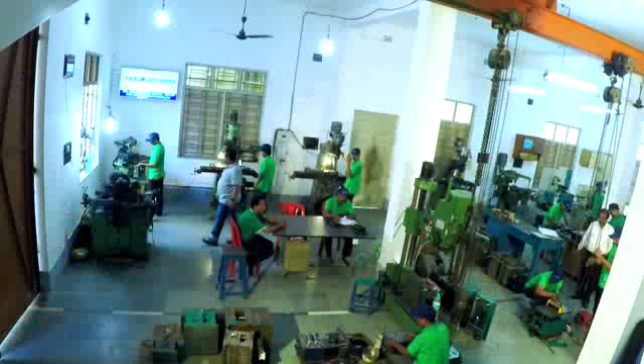Now they make die and mold for a number of engineering companies, including Indian Railways. At present, around 40 people work in their 2 units. Their quest is always on for continuous improvement through further innovation and application of new technologies.

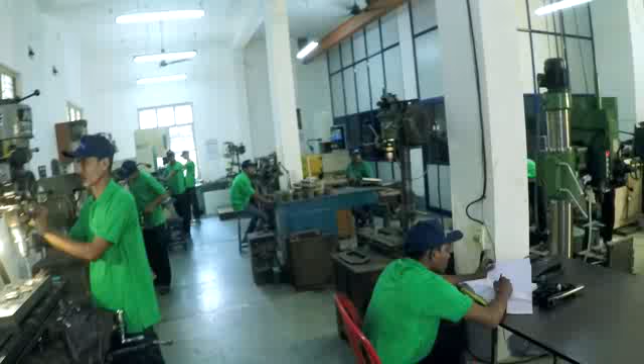Besides marketing, Mr. Sashmal also personally looks after the minute detailing of mold design. He makes sure that his minute monitoring and constant supervision is all throughout.

Actually, when I left my job, I used to get a salary of 300 rupees. A man who once used to get a salary of rupees 300 only now pays out salary to 40 employees under him.

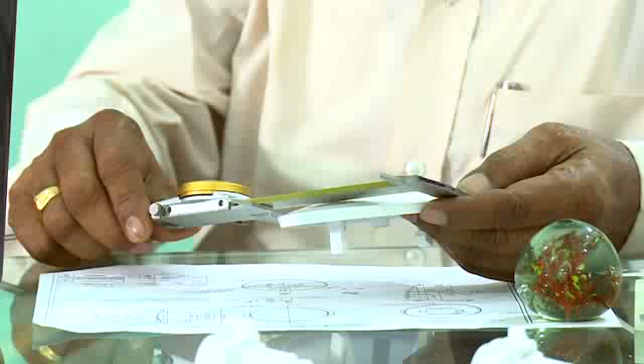Their present client bank includes Supreme Industries, Exide Industries, Philips, Orient Fans, Tata Motors, Rishta Polymer Industries, Sumangal Electronics, Plastotech Industries, and others, to name just a few. Not only in India, the molds and finished plastic goods manufactured in the 2 units are exported to SAARC countries and United States too.

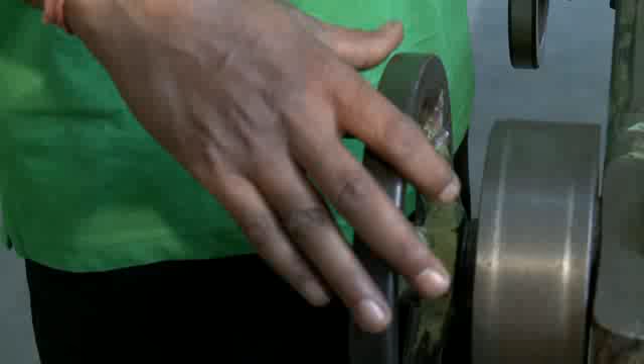Sree Dies and Molds - we have been associated for more than 10 years. I am deeply impressed by his knowledge, and whatever product today we are making, all the product dies have been made by Sree Molds, and I am more than satisfied with whatever product is produced using their dies. Their service is excellent, their quality of workmanship is excellent.

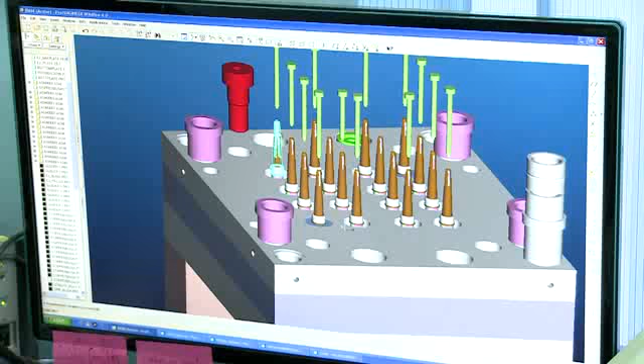Now let us explore the Sree kingdom and find out how they make all these precious and customized molds for respective clients. Once the component drawing is received, which is the first step, the planning can start for the designing of the mold through 3D modeling.

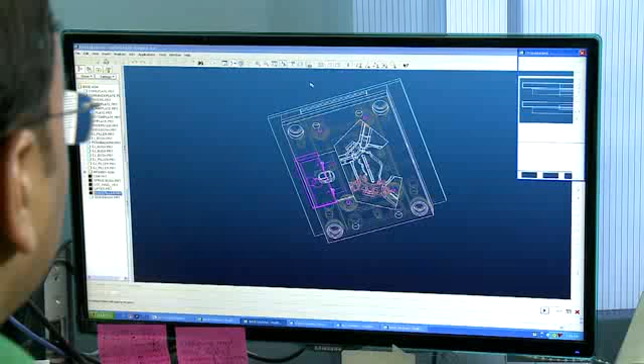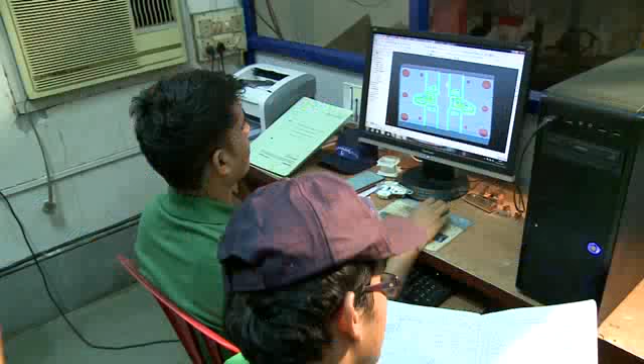Now comes pre-tooling, that is shaping, grinding and boring. The CNC programming follows, which involves the mold base and the core and cavity machining.

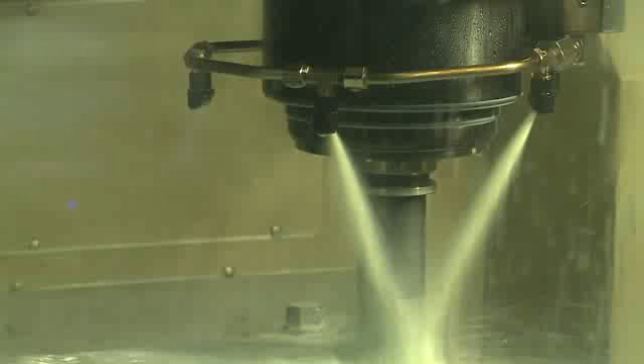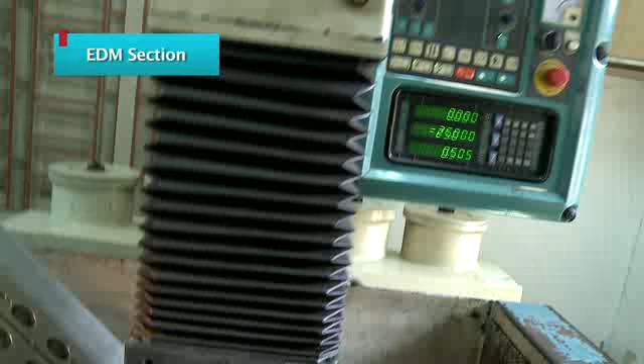The next step is electrode, CNC and EDM. Core and cavity, followed by EDM. The electrode is made on the CNC machine, and after that, it is sparked on the EDM machine - meaning EDM is done on the cavity.

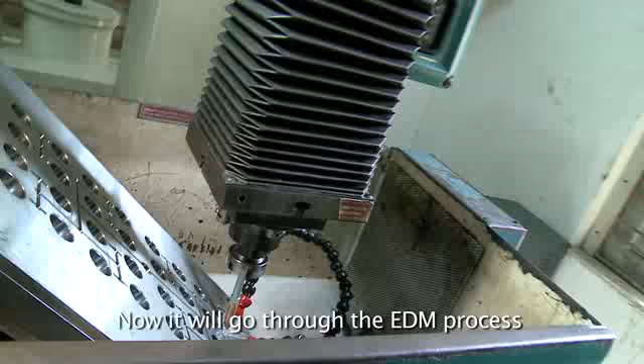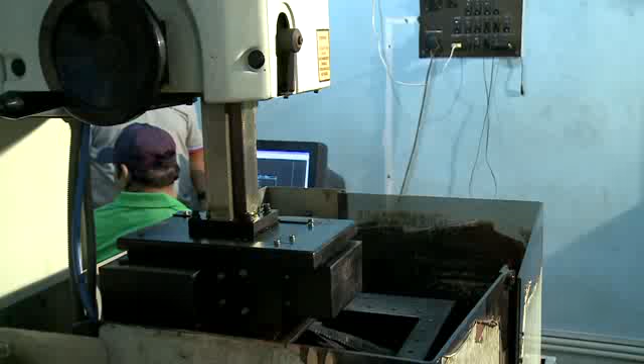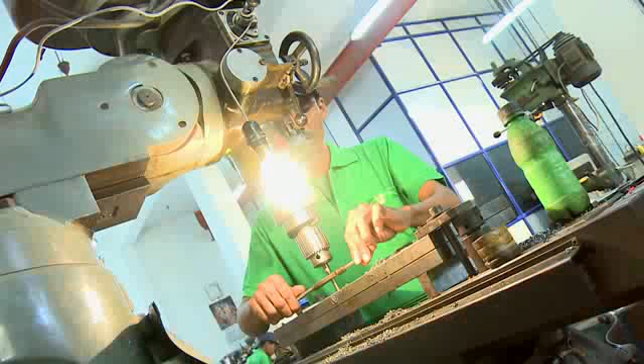Now to the tool room. The milling, grinding, assembly and polish of the mold is done at the tool room. The polished and finished molds are checked and the first trial is conducted in-house.

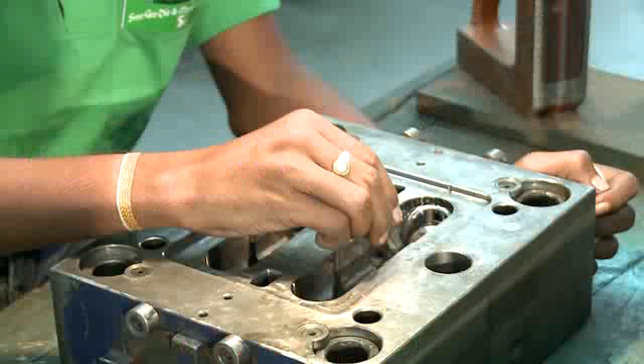The product validation report is generated and necessary corrections or reviews are done before it is sent for the second in-house trial. This is a core plate piece that has come here after CNC machining, for inspection.

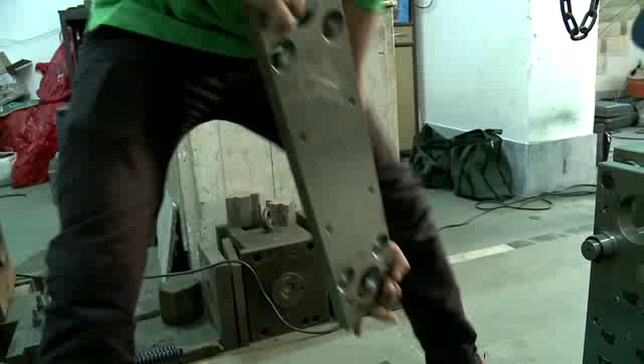The brother duo really make sure that their product attains perfection before going out to the customer. The final sample passes through stringent quality control and assurance parameters.

We are satisfied with the job of this gentleman. Sashmal actually, to be named, and his brother also quite efficient in production jobs. As far as engineering is concerned for tool making and mold making, they are quite competent. They have got good experience and knowledge in this line. They are time-tested people, and we are quite satisfied with their job.

They have opened their in-house mold testing unit and solved the problem they faced earlier. This unit has gradually elevated to a full-fledged plastic product manufacturing unit.

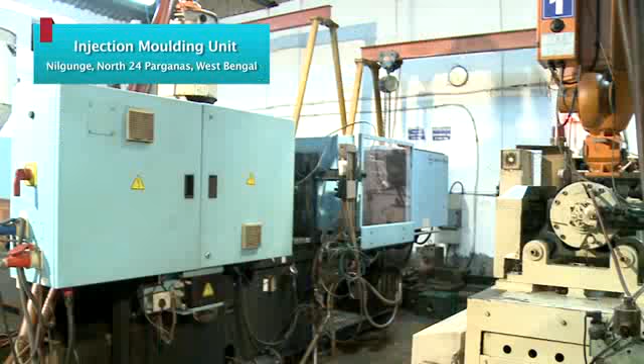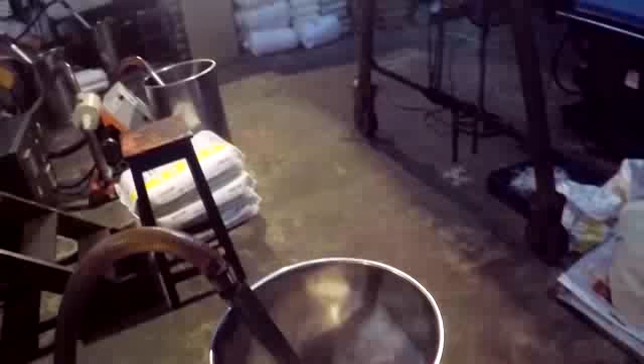Now to the other kingdom, the processing unit where the plastic goods are produced through the injection molding system, the molds being indigenously produced in Sree's factory itself, after procuring the raw materials from Haldia Petrochemicals, Reliance, Absolac, Dupont. In this factory also, like the previous one, the necessary corrections and reviews are done, including the first and second trials, and the sample is drawn out and all samples are thoroughly checked before the final product is rolled out.

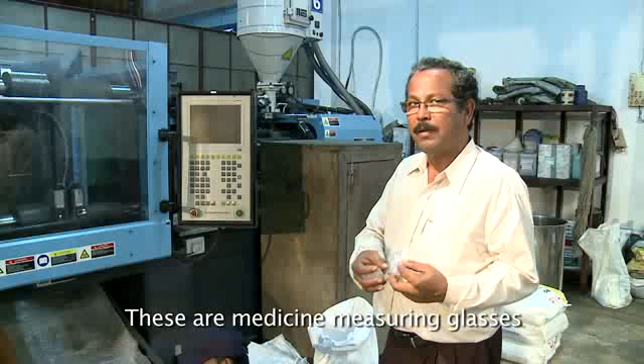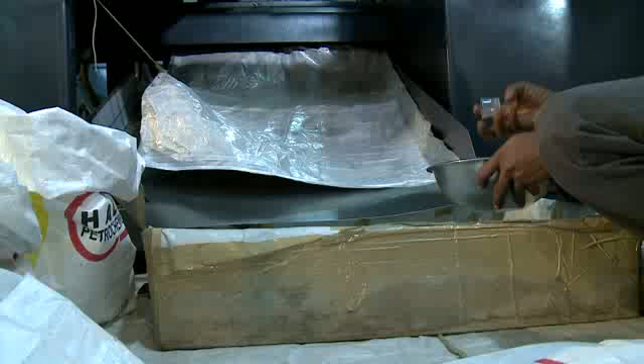The product's range is so diverse, it caters to many industries: automobile, electricals, electronics, safety, soft luggage, textile, medical, battery, and many other household segments.

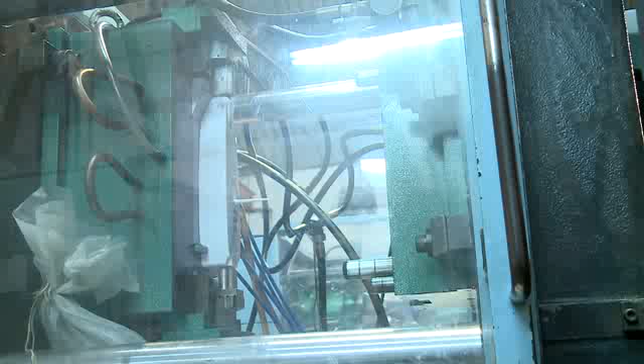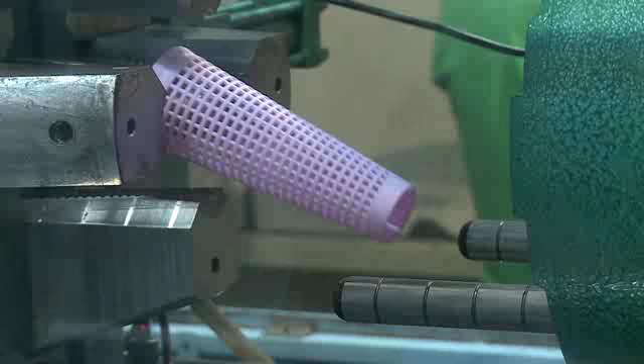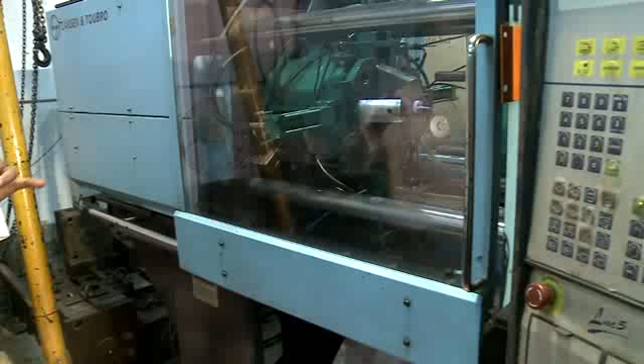The molds of Sree Die and Mould Manufacturing Private Limited are being used to manufacture the finished products also, both from the same firm.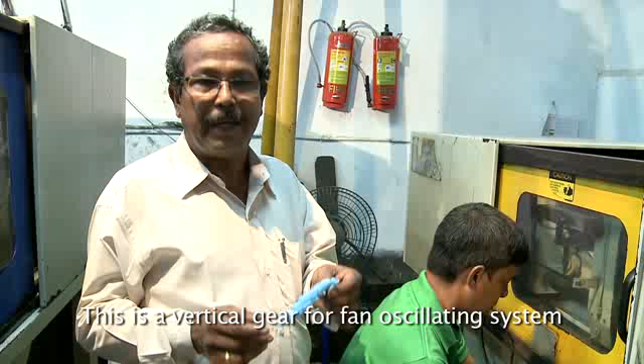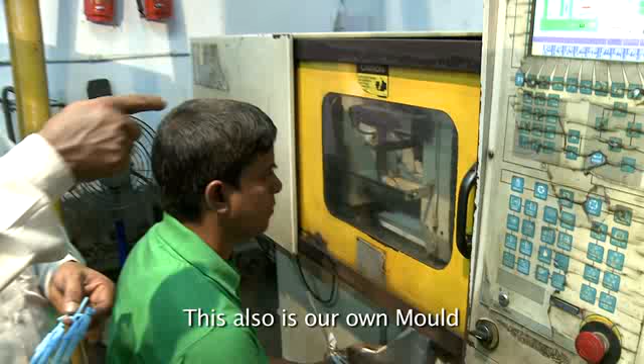I know Mr. Sushanta Sashmal since about the last 10 years. We have made a number of molds, critical molds, from them, and we found that their quality is very good, and it fulfills our expectations regarding the quality of the molds and delivery time also.

In fact, they have injection molding facilities also in their setup, and what it helps is that whatever tool or molds we make from them, they get it tested. It can be tested there at their facilities, and we get the product accuracy. If any corrections in the molds are required after necessary trials, that can be done at their end only. That is an added advantage to us.

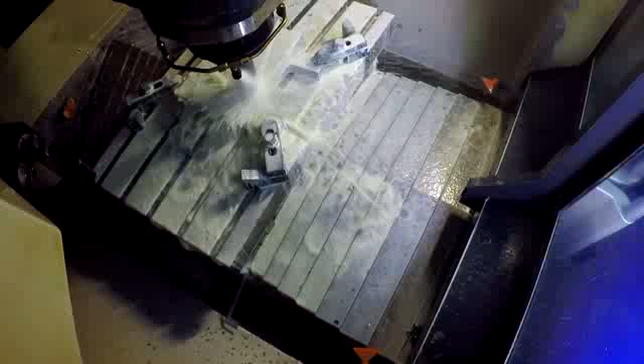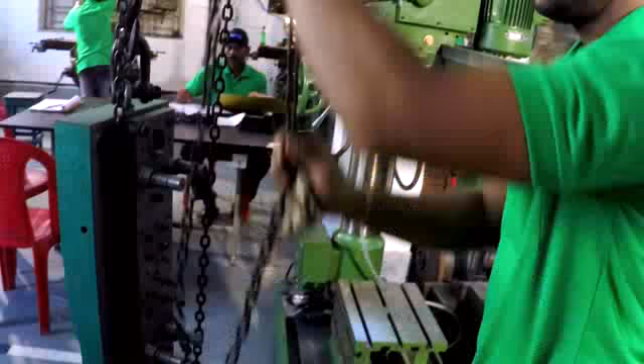You may start with a fistful of money, but if you have ambition enough, the sky can really be the limit. We believe so. There are still many dreams untouched. Every day is a new step ahead to excel, to join hands with you, and to serve you with our enormous plastic capacity.

Mould is the mother of plastic.